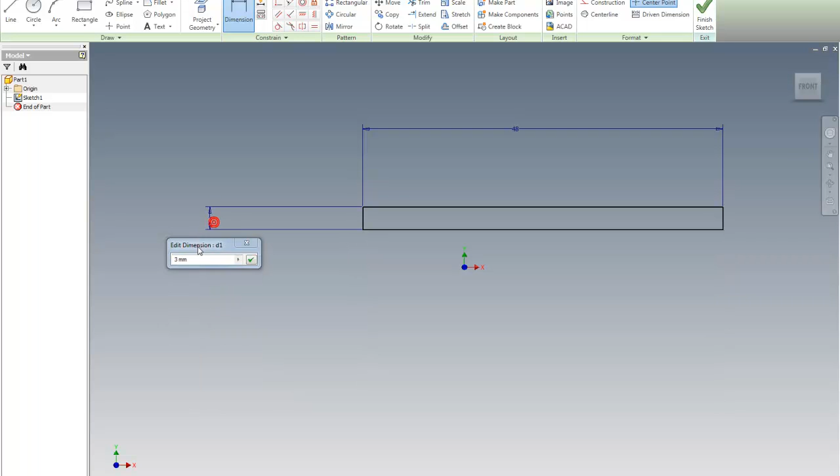Okay, I'm going to dimension my rectangle. And my rectangle is 48 by 30. Oops, 30, no not 3. 30, there we go.

Okay, now we got 2 radiuses, and those are 12. But I'm going to do a circle. Pick it right here. Notice it finds the midpoint, not the center, excuse me. So this would be 24, would be a diameter of 24 and a radius of 12.

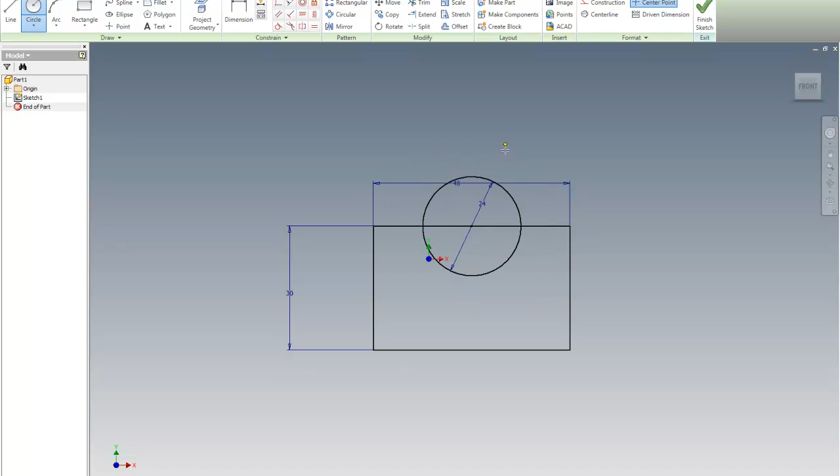Okay, let's try something. Let's see if we can copy this. Select the object. And then the next thing is the base point, which is that point right there. And then I'm going to go down here to the midpoint, which is not giving me, but I'm going to place it there anyway, and go done. And it didn't do it.

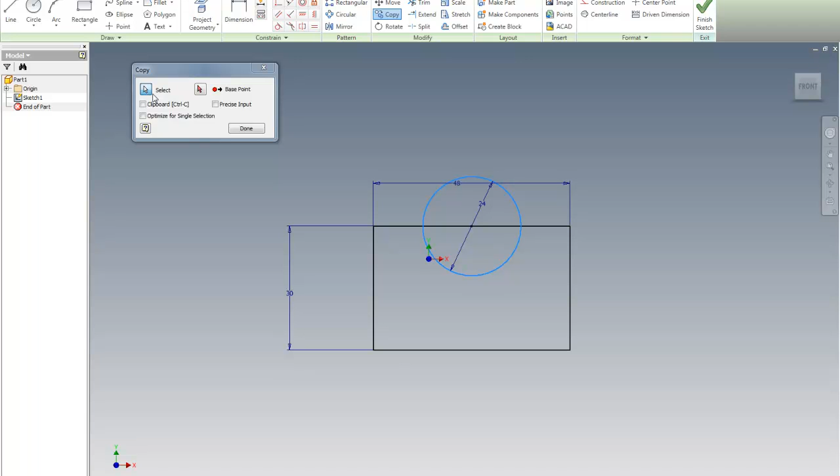Let's try it again. Copy. So I selected, base point, base point, done. There we go.

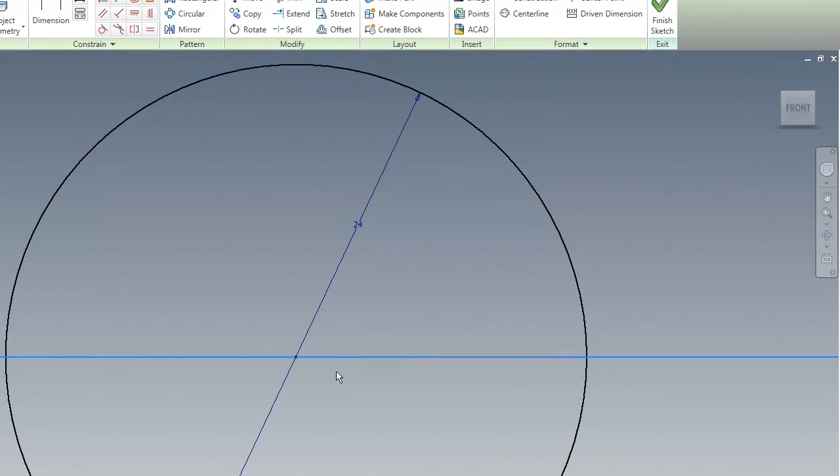And I want to make sure that's on that, and it is. It's right on this point there. Okay, then we can just go up to trim, trim that, trim that, trim that, and trim that.

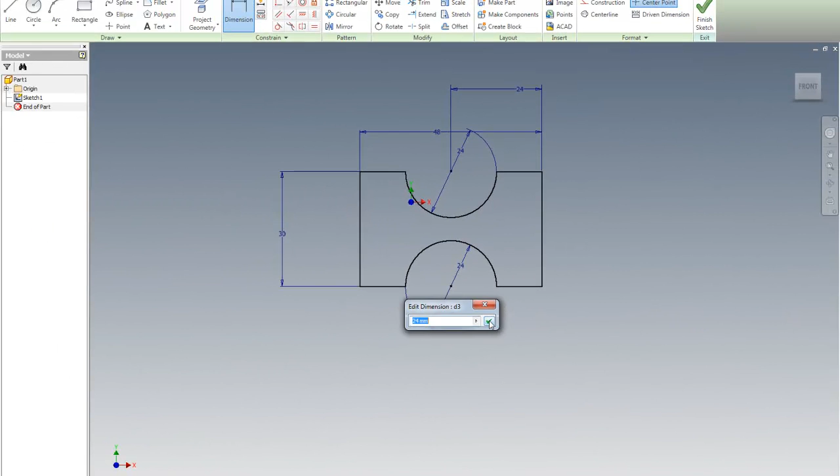Okay, just for my own edification, I'm going to double check and make sure everything is centered. And that is 24. And that is 24. Okay, so I actually don't need those 2 dimensions at all because the constraints are at the midpoint of that previous line.

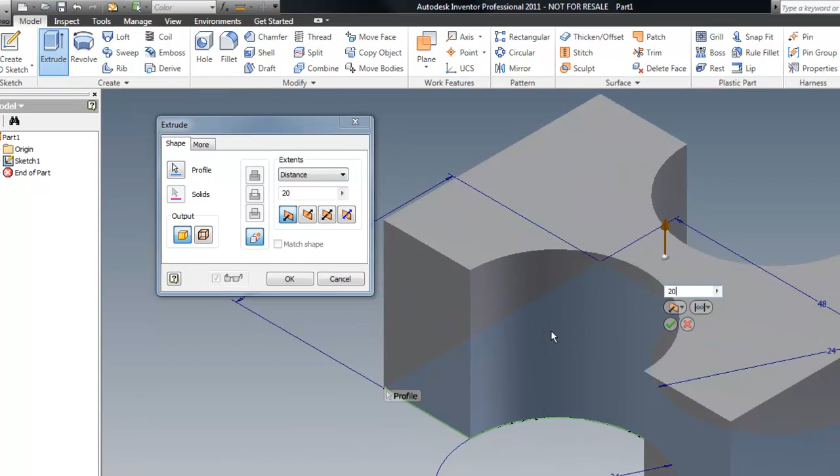I'm going to go right click, finish sketch. Okay, and I'm going to go over here to extrude, and it looks like maybe it's 20. Let's see how that looks. I like that, that looks good. Okay, and hit the little green check mark, and we're good to go.

And as fast as we got that done, we're going to go over here. We're going to go to open, and I'm going to go to my weekly assignments. I'm going to pick my template, and I'm going to pick my IDW template here. I can pick either one, either my DWG or IDW. This time I think I'll pick the DWG, and this is also in metric. Okay, and open.

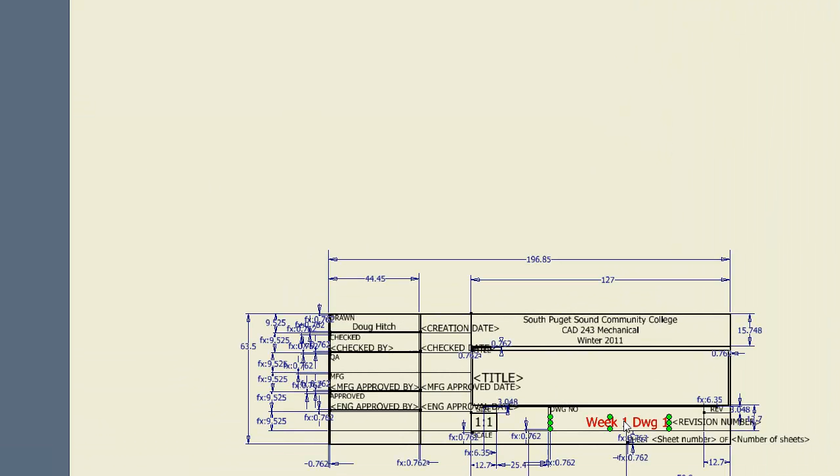And I've changed this one. Now this is one of the things I should be changing, right? So I should go in here and drop this down, drop down to title blocks, find my title blocks, right click and edit, and go into here, right click and edit text, and tutorial number 3. Okay. Title block, yes. Okay, so I'm good to go there.

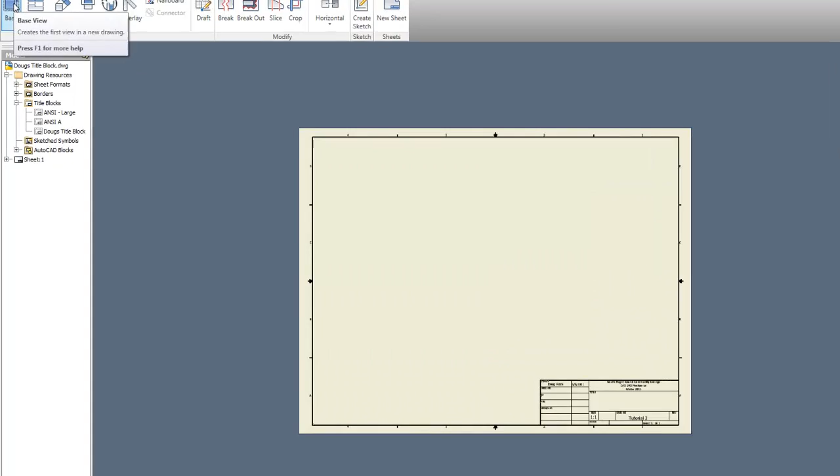Then I'm going to go in here into my base and place, in my Place Views tab, base. Okay, and you can see how small it is. So I'll make this one a little bit bigger. I'm going to go maybe 4. Yeah, 4. Oh, and what does that tell me?

I haven't saved my last part, so I have to save that as tutorial. See, it's already in there, and I just need to change the number to 3 and then save.

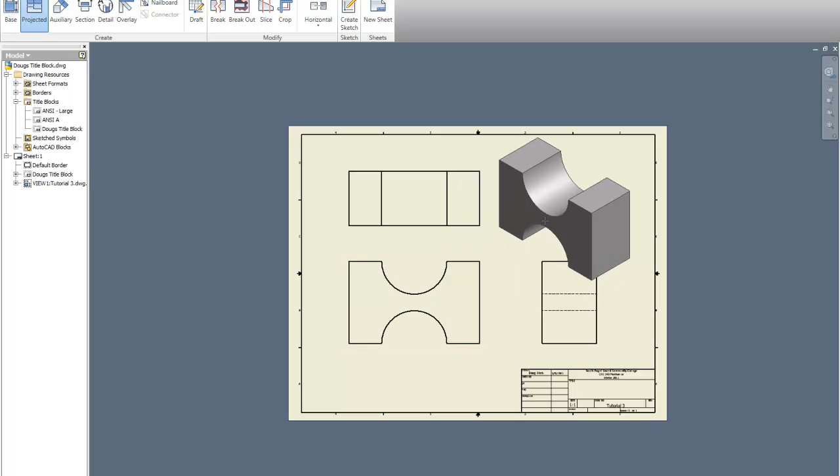And I'm good to go then. Pick and create. Okay, now notice it jumped out of there before it could create that. I'm just going to go to projected, pick the block, bring it up here, right click and pick it. Come on now, you're fighting me.

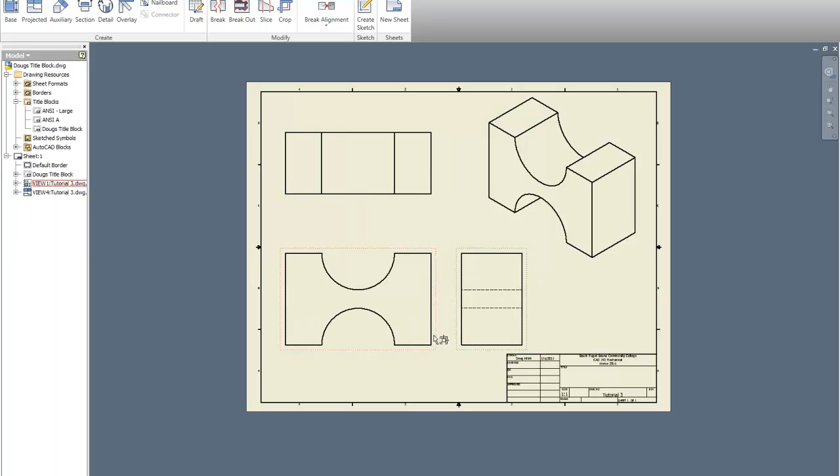Projected, pick, right click, and create. There it is. Okay, now here is a case where my scale is just a bit off. I probably can get this all in here. We can try here and have it look nice. I mean, it's presentation again. You want things to look good. You don't want them to look crowded.

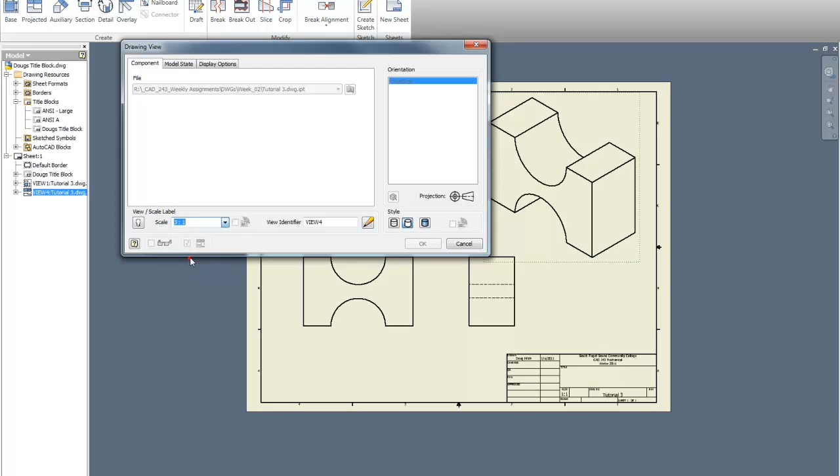Okay, I could try going in here and go to Edit View, and I could change that scale to 1 to 3, and let's see how that looks. I kind of like that better. Rather than having it be two different scales, I'm going to go ahead and Edit View and change that 1 to 3. Okay, or actually 3 to 1, and shade it. Now that looks good. That's a

Good layout. Everything has enough room. Nothing's crowded. It looks nice.

Okay, and we're going to do a quick dimensioning. We'll go to Annotate, and we're going to go here for our overall distance. Okay, I'm going to actually hit Escape a couple times. Move this up just a little bit so that I can have my dimension for the width across from it.

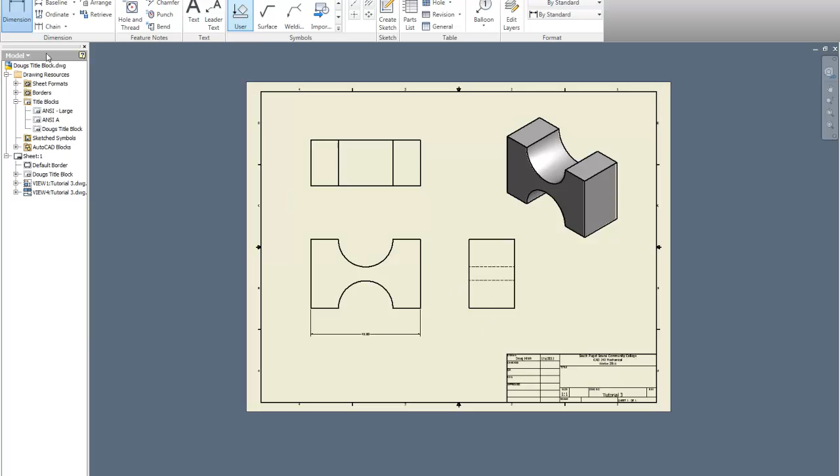And if you want to pick the line, you got to usually kind of sneak in on it, and it's just not going to let me do it. Okay, so we'll go to the ends, and notice. Okay, and then I'm going to pick here.

Now, first time we've done a radius dimension. Pick the radius, and there it is. Okay, and what I'm going to also do is go up here. This is something new. Up by symbols, there is center mark, and then you just pick the radius that you want to center mark.

And we have one other dimension that we need, which is this line here. And again, you're just going to fight me, aren't you? There we go. Okay.

And what I should do now, this is something new that you haven't seen, so I'm going to click in here, and I'm going to edit. Now the dimension is inside these arrows, so we're not going to do anything about it. I'm just going to go right outside it, and then I'm going to type TYP for typical. There we go, and you can see that it's there.

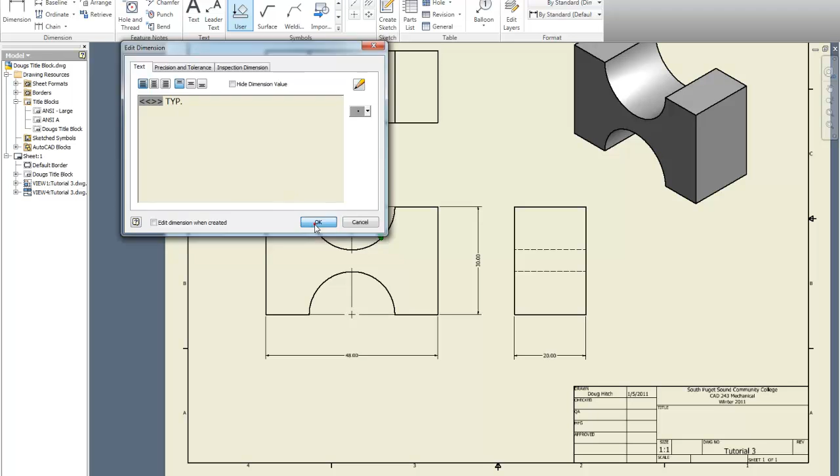Okay, now I'm going to pick that dimension. Control key, holding down, pick that dimension. Pick that dimension, pick that dimension, right click, precision, 0. There we go, and there is our project all dimensioned and ready to go.

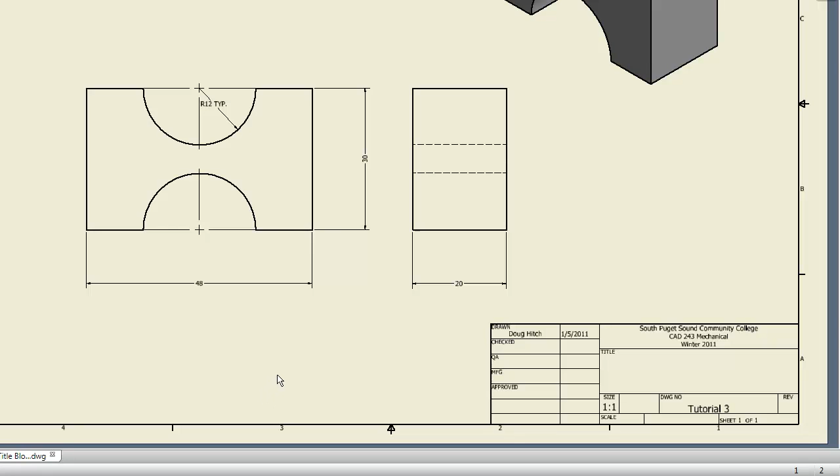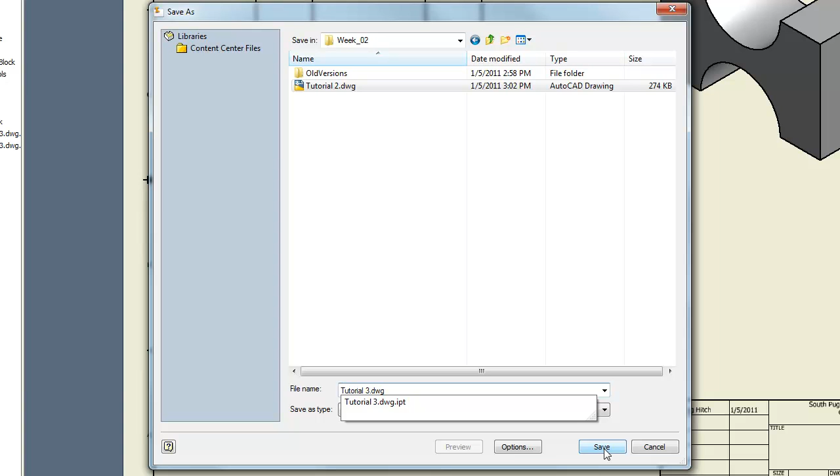I think that's pretty self-explanatory. That's pretty darn good. I'm going to go File, Save, and File, Save As, because I want to put it in a different place. So I'm going to put this in my DWG file, and notice I have to rename it here. So I'm going to pick tutorial 2, and I'm going to go like that, and I'm going to go 3. Okay, and save. Okay.

And I'm going to close this out, and close. Make sure we've saved this somewhere. File save, and file save as, because I want to, and it is in parts IPT, week 2, tutorial 3. I don't want the .dwg behind it. Save. Okay.

Okay, then if I want to, again, I can go over here and open up my file. There's number 3 right there. And I'm going to open with AutoCAD application.

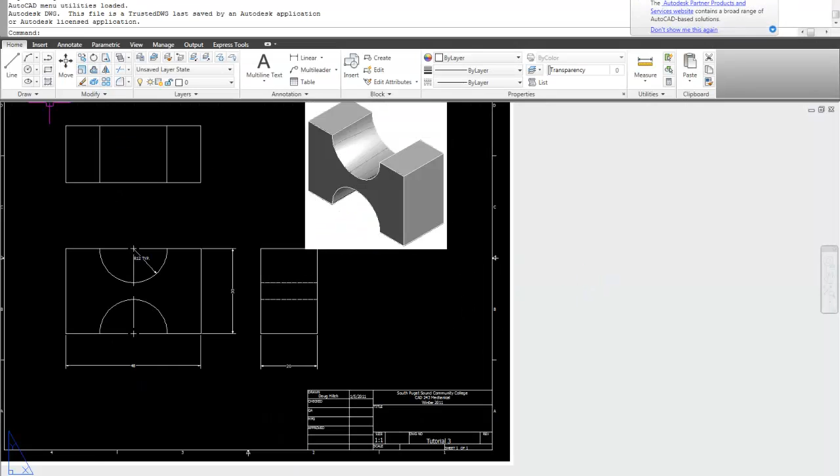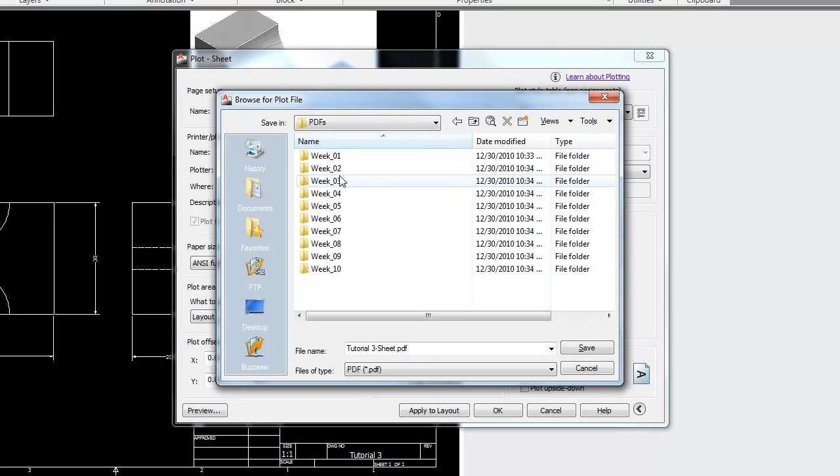I'm going to go File, Print. I'm going to go up here and pick to PDF. Okay, preview it, and OK, and put it where I want it, which is in Doug's weekly assignments, and this is PDF week 2 and tutorial number 3. Save. There we go. Okay, so as I'm building these, I'm building them for you.